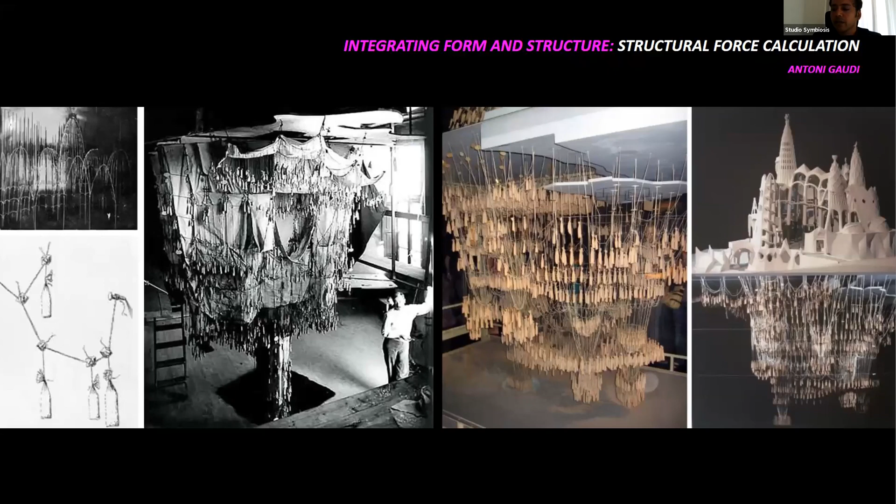So both these projects are looking at a system which was set up by the architect, but the design is generated through external forces, forces of nature. Why forces of nature? Because anything in nature exists in perfect harmony - you'll not find anything in nature which is out of balance. By using gravity and the wool thread method, what it essentially meant is that the project is actually in balance with the structure. And so this was one of the design elements used as a diagramming tool.

Now coming a bit more towards the current scenario, this is OMA. So the image on the left is showing this program, right? This program consists of housing, it consists of offices, parking, all of these things.

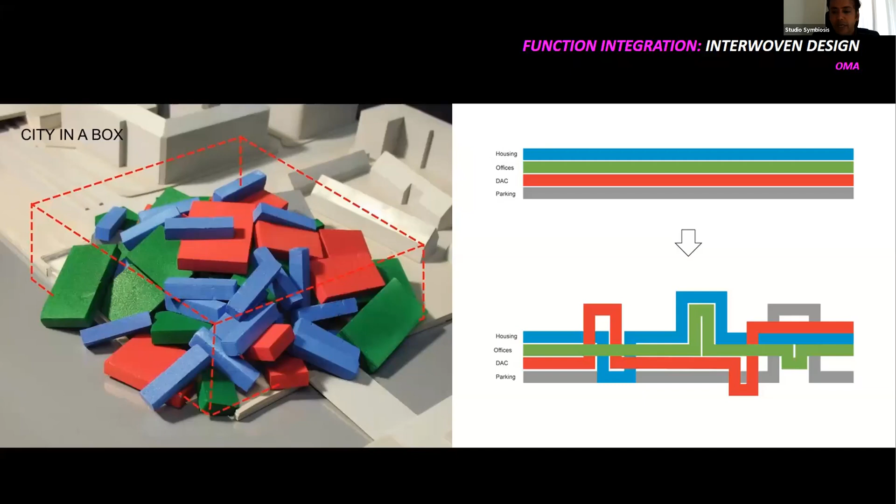What you see on top are four non-woven programmatic elements which exist. Using a diagrammatic system to interweave the program is a very simple system. Program at times is seen as a very banal thing by architects. But what OMA is doing at the bottom is interweaving that program in plans, sections, and elevations by nesting them into each other, getting a very rich interlayering and interaction of different functions with each other. So this is diagramming as a simple way of interweaving the design.

Why is it useful? By doing trajectory movement analysis, you can take out the most redundant space of any design and create a very robust and efficient design. So this is why movement analysis is very critical.

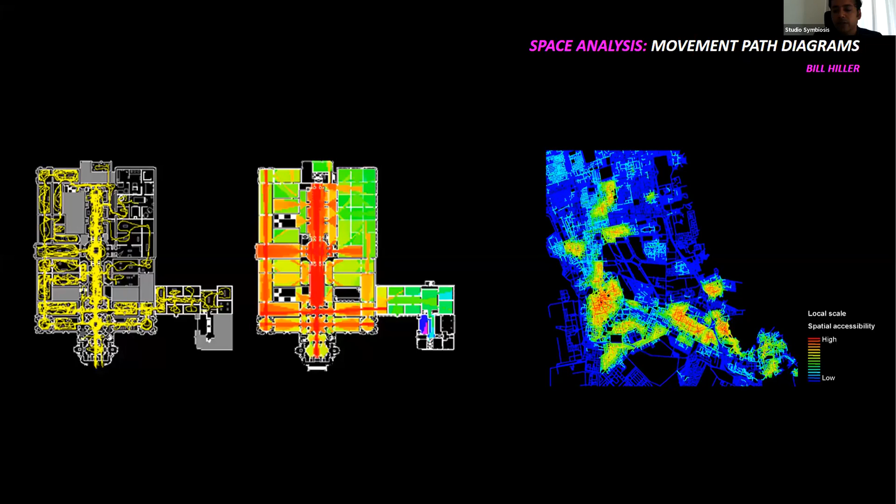Now agent-based modeling and other things are being done. Going to the city scale, space syntax - Bill Hiller is the master here. In this particular case, on the extreme right, they are doing city-based mapping of the hotspots of the city. Even now, if you're doing master plan studies, for railway stations you take 5 kilometer or 2 kilometer radiuses and analyze traffic and movement. This diagram helps you resolve that - the left two are for spatial analysis for a small architectural space, and the right one is for city level analysis.

Now for this diagramming system, I would like to present them in three systems. One is natural systems. Then how do you translate context using a diagram? How do you create an iterative system, iterative loop, or computational script - whatever you want to call it - as a diagram? And the last is material intelligence. I might not have time to cover all of them, so please stop me when I'm done with the time so I can move on.

The first one is about translating nature. This particular project is a perfume park and museum based out of Kannauj. Kannauj has this very rudimentary grassroots level perfume making, we call it Ittar - the essence of perfume. On the right are beautiful, elegant images from Grasse, France, where Christian Dior and other perfumes are made. This is a twin city agreement between Kannauj and Grasse to create a skill development center and perfume park and museum in Kannauj, where French perfumeries will come and train our local craftsmen. It's also a tourist destination. So for us, when we speak about perfume park and museum, that's the project.

Flower is the essence of creating a perfume. Perfume is made a few different ways - in Grasse, they always use flowers to create the perfume. So basically the essence of a perfume is a flower, and that's where we want to start. But having said this, we did not want to make another lotus temple - we do not want to be very literal. In our geometries and architecture, the systems are more important than the final look of the project at times, because the system is what organizes the geometry.

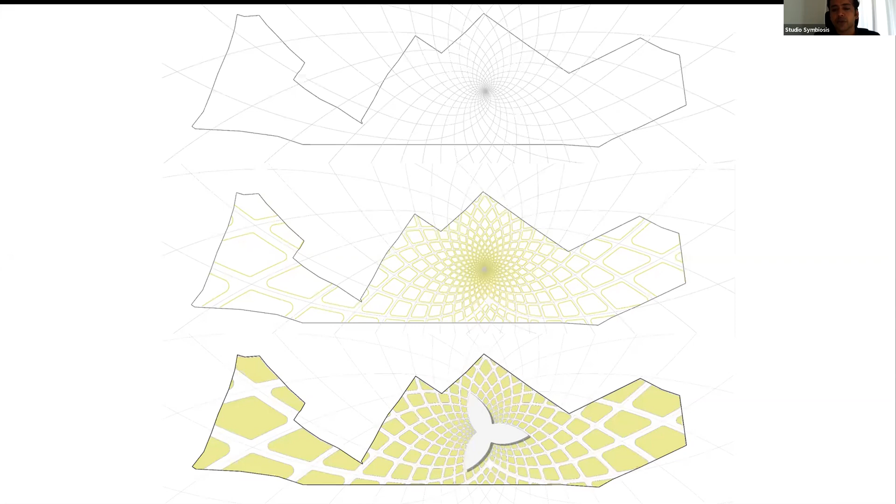So this is how the overall design came into being. You see these two big buildings on the left and right, and then in the heart of the project is the perfume museum.

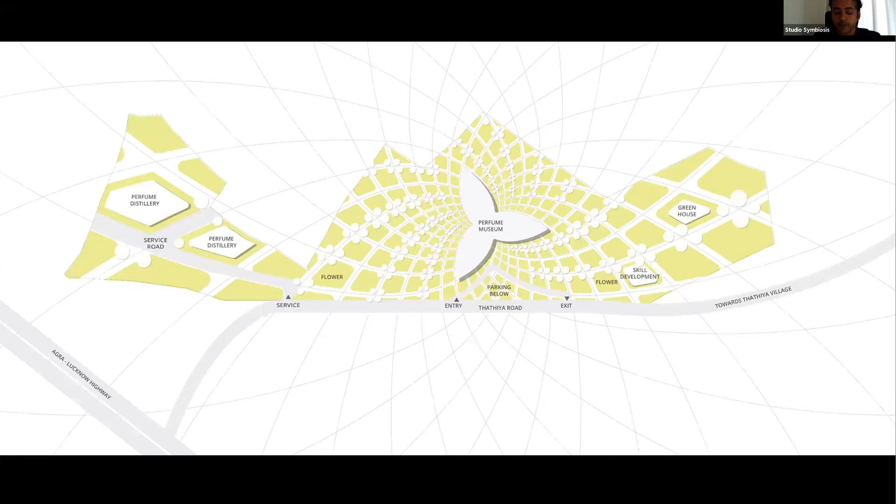Again, because it's a diagram-based system, this Fibonacci series also evolves in terms of the ceiling and the roof system of the main building. The main building itself is 3 petals of a flower. So this is how we conceptually modeled and designed it, which becomes a central part.

And then there's a gradient in terms of a very public function for the visitor, and as you move outwards, it's more for the function which is happening for the performance of the particular site.

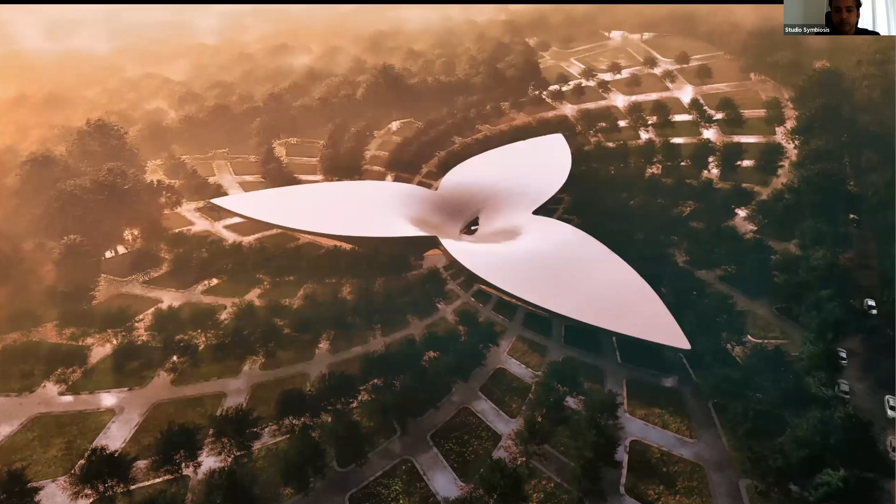So yeah, this is the overall view. And with these Fibonacci lines, the very nice thing which came as a surprise is that when a person is moving on the site, the trajectory of movement is always heading towards the museum. It converges, because the diagram is based on a convergence diagram, so everything converges into the central museum, and this becomes a main focal point of the design.

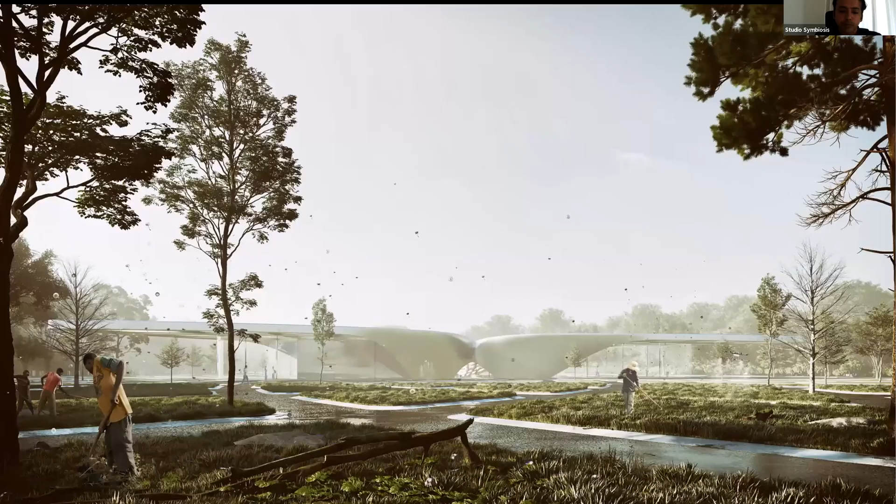So this is just showing the day-to-day gardening of the park and the dandelions flying around.

Now the second project is again a representation of nature. The project is based in Udaipur, and the idea for us was to create a dune complex. It's a 1.5 acre property, and the idea is to create these villas, one villa each, 8 villas in total. We wanted to translate this context of the beautiful sand dunes, this beautiful color, so that a guest, when he comes there, experiences that he's staying in the dunes of Rajasthan. So this was the ideology behind the project.

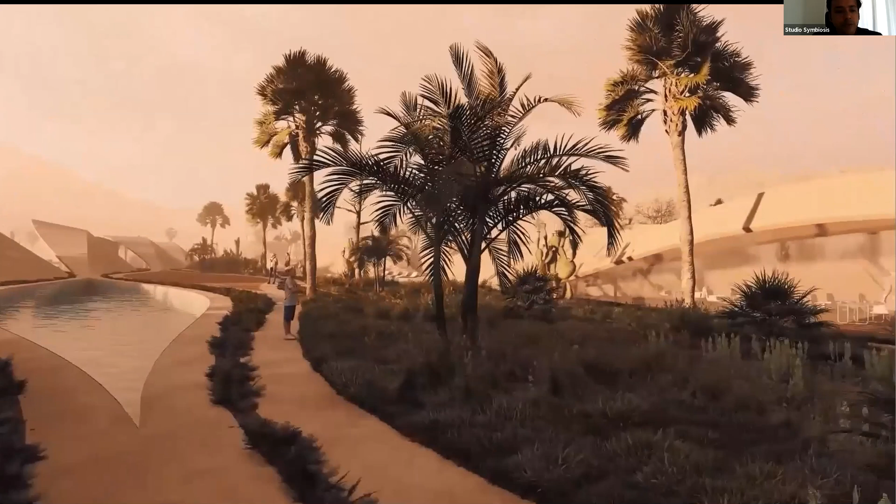Also, the materials are lime plaster, and we're using ferro concrete for the shells. The idea is, of course, also not to shoot up the cost of the project by doing these contemporary complex geometries.

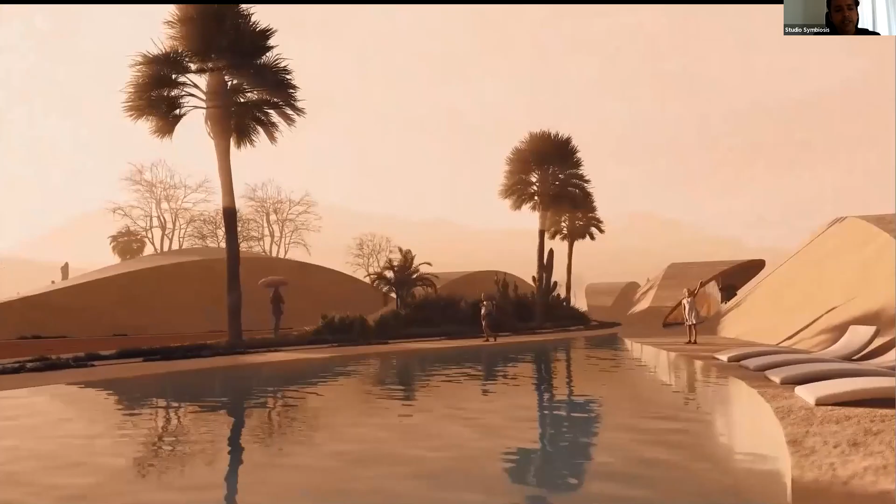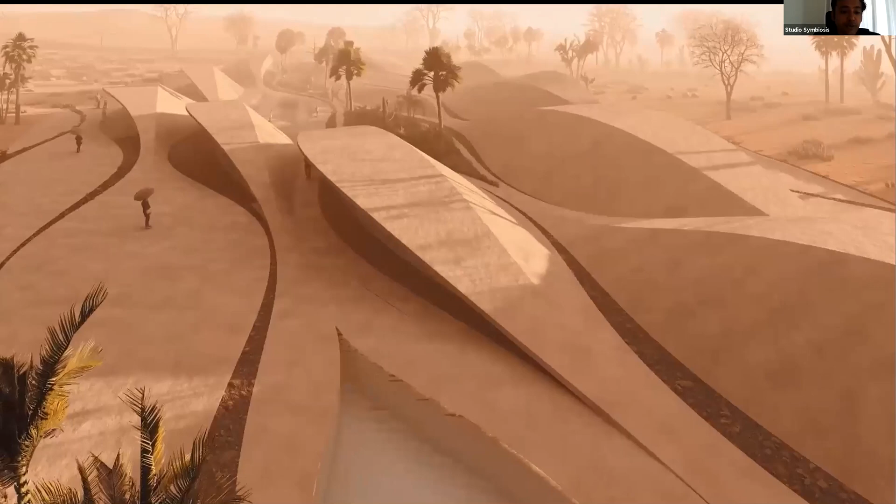So the central part of the project becomes an oasis with the water body, the pool sits here, and the villas surround it. Each villa seamlessly flares out from the landscape and disappears back into the landscape. This was the entire thinking, that it should be about nature, so when a person comes here, he should really experience what Rajasthan can be about, or if you are really a person living inside the dunes, let's say, this is the feeling we get.

So these are just some of the images from the project which we are constructing. Again, architecture is not just about visuals, it's also about constructability, which is very important.

As far as possible, if we can be sustainable, not just in terms of materials or other things, but we should also be sustainable in terms of the local craftsmen, because we cannot use excessive contemporary technology, and at the end of the day our local craftsman becomes non-existent. So this is something we are at least trying to avoid.

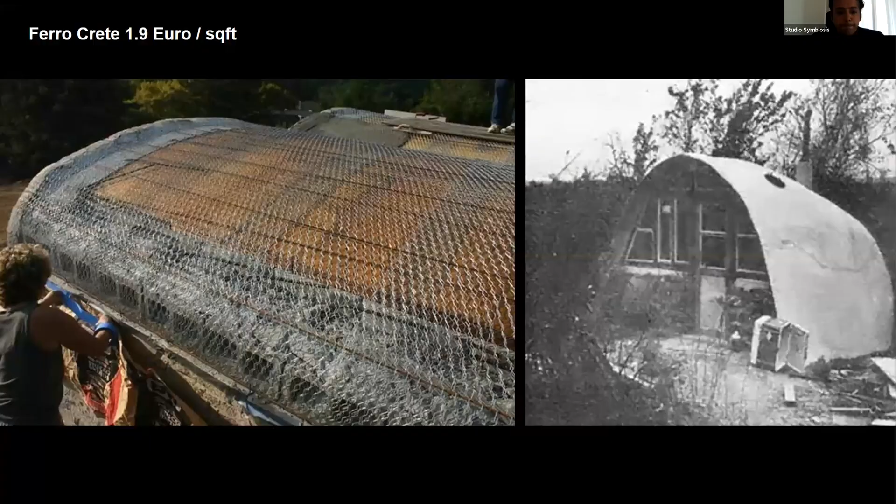So these are some more visuals where this dunescape is forming from the landscape. It's a ferrocrete shell which we are creating. In Udaipur, they have some ferrocrete engineers and contractors, so we are using these local contractors using ferrocrete. It's a very simple and very old system.

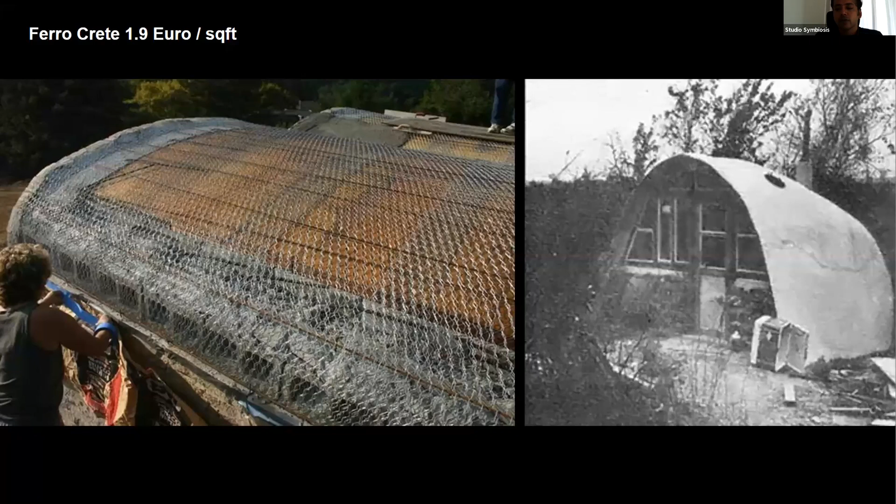But as we get more contemporary, a simple example is chip flooring, used in India, which was about 50 to 100 rupees a square feet, versus terrazzo, which is Italian flooring, at 1,000 rupees a square feet. Most people cannot tell the difference between the two. Similarly, if you look at a ferrocrete shell versus something very contemporary using laser jetting and laser cutting, at the end you cannot really tell the difference in technique or technology.

Another thing we are doing is promoting local craftsmen who do lime plastering. In the renderings, the texturing you saw on the building is using lime plaster, which essentially finishes off the ferrocrete shell. For this, we are again using local craftsmen from the city, from Rajasthan itself.

And the central part of the project becomes the performance area, because if a guest is coming, there should be a multifunctional area in the project where local artists can come, there can be some exhibitions, there can be multifunction space.

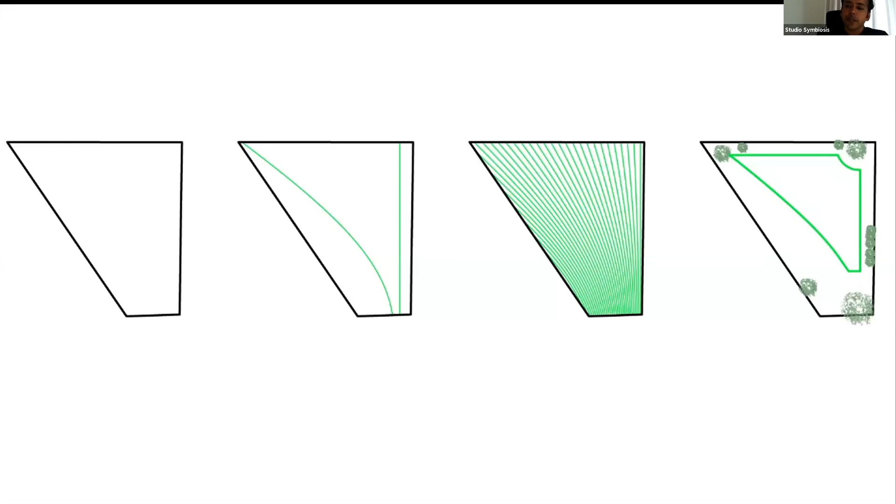When we visited the site, the client's brief was really that, Amit, if I can see the park from the house, and also if you can give me some green in the house. So based on these two design briefs, we create a villa which is sitting there. These streamlines come inside the property and create the overall form for us. So this was the concept design.

The idea is that the landscape seamlessly merges over the building, and as you step up, there's a rooftop garden. There's a direct connection we try to create between the built and the landscape by creating the steps which are emerging. The reason I'm showing you this is to also show the final image.

And of course, it was all about clean lines, because the outside of the project has this very clean line, so inside is also about the same.

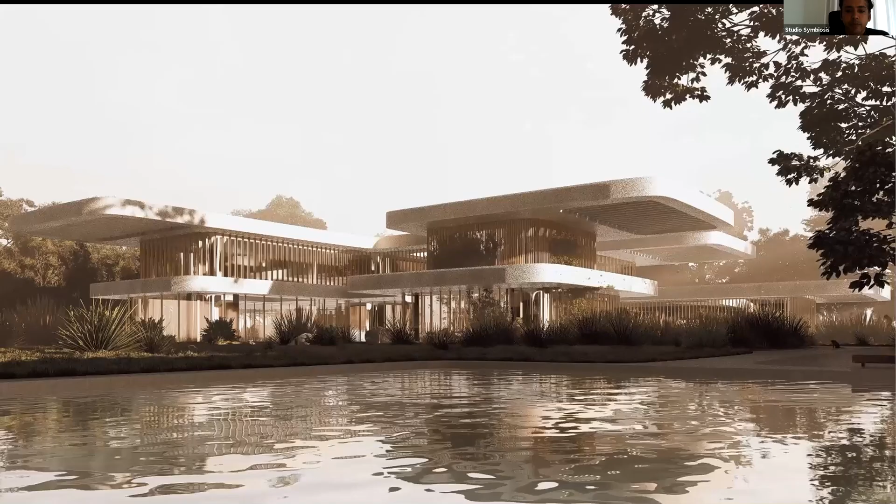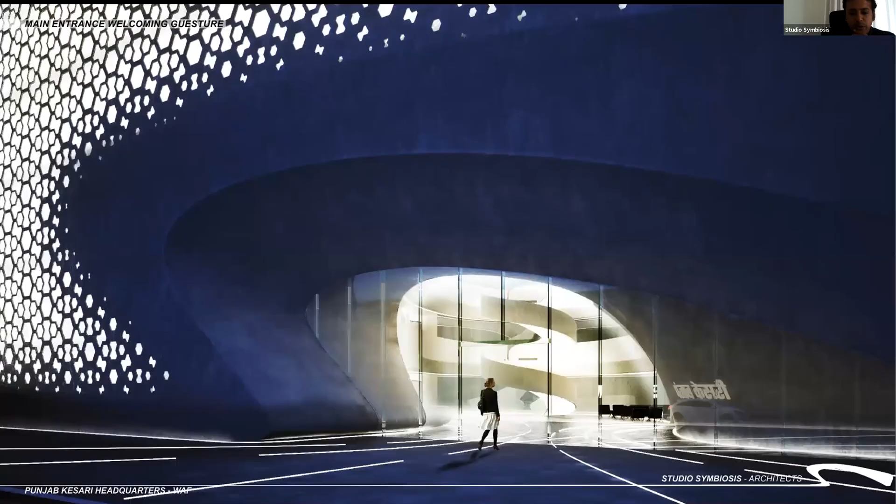So this one, the third topic is iterative systems. I think this project, some of you might have seen. This project now is finally about to finish in 2-3 months, the mockups are being done. I'll be very quick about this, because it's a very highly published project.

The entire thing about this was, when we started this project, the diagram for us was a counter thesis to all the projects which exist in Gurgaon. In Gurgaon, we have all these glass buildings, offices, but when you go inside the office they have to pull down the blinds because the amount of light coming inside is so much that there's too much glare and they cannot work inside.

So the thing about creating an office or any building is creating optimum spaces. In this particular case, the optimum lux level we were looking at was 500 lux on the desk height, and the glare index was also looked at. So for us, the diagram was basically the thesis which became the diagram and became the design.

And then as you come in, the lines of the building pull you in, the floor lines, the light lines.

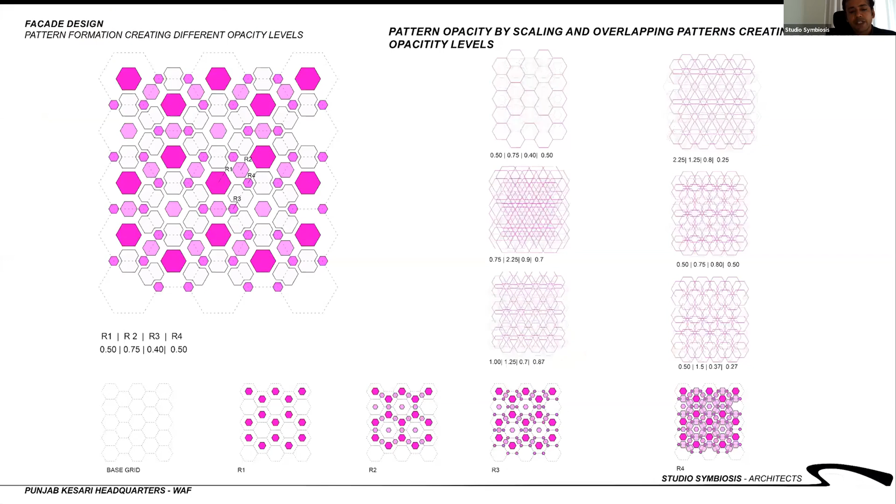So it was an iterative design where the facade pattern changes based on the view, escape, where the optimization of the wall-window ratio is done to create this opening ratio. North facade is 87% open, because there's not a lot of direct sunlight coming in, and south was 27% open. We increased it a bit because from inside it was a bit too closed, so we had to also look at this — you cannot just go by numbers from the computational systems.

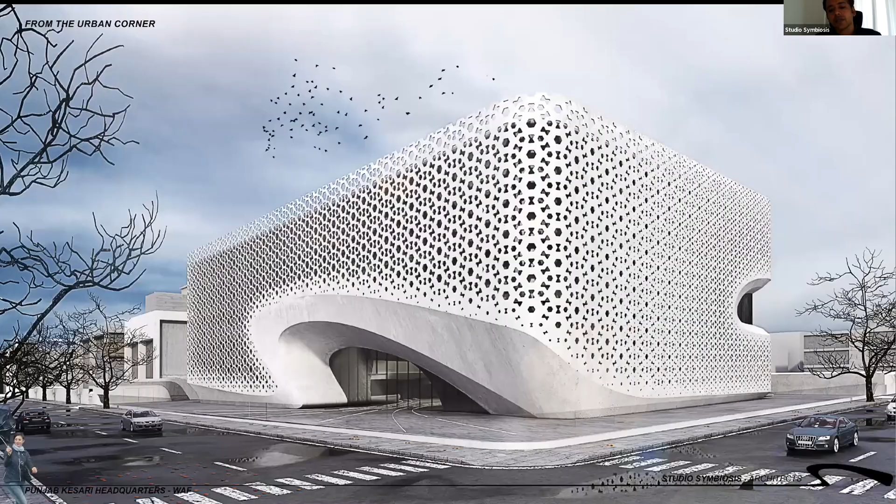So this one is an office building in Mumbai. It's a mixed use project actually — the lower part is office and the upper part is a residential building.

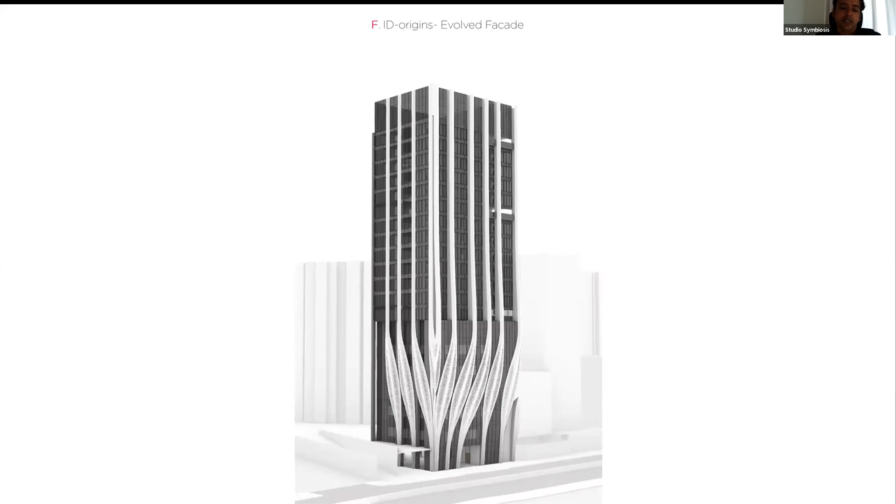The reason this sits in the iterative project is it was a very difficult project for us, because the first small building you see is the existing part of the project. This project sits there from the 1980s. The project is called ID Origins — ID is the name of the owner, and Origins is where the company started. Because of the sentimental values they had, they did not want to demolish the existing building.

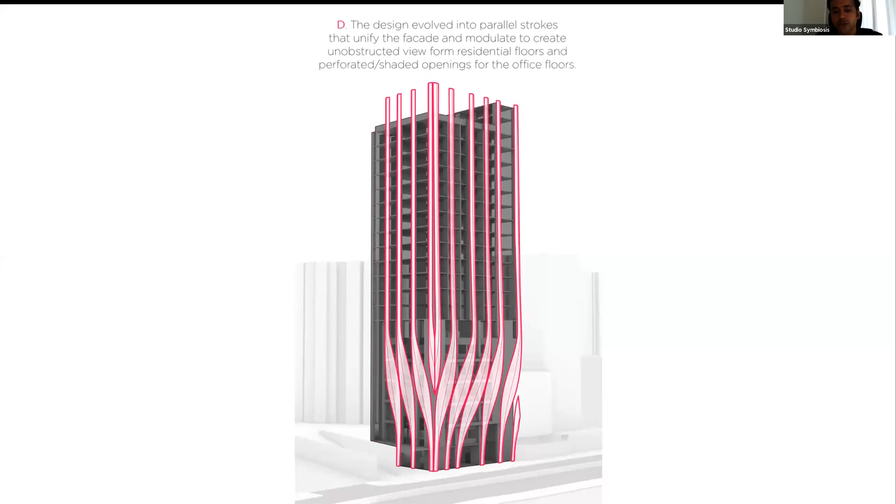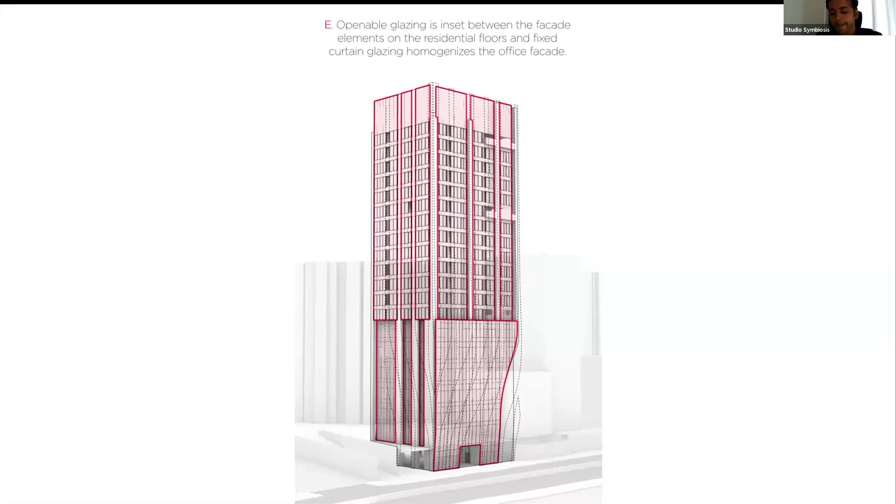The idea was to retain the existing building where they would operate their office from, extend on top by putting a transfer slab, residential floors, and somehow combine it. Because the existing site is so constrained and the structure is very critical, we had to pull these columns from ground up. So it was a very authority- and numbers-driven project to start.

But then how we tried to evolve this and make it a bit more articulated was to create these calligraphic strokes, which articulate the column grid of the lower floors with the column grid of the upper floors. This is a classic case of converting design challenges into design opportunity, because it was really a very shifted grid and the building steps back, and a lot of things happen.

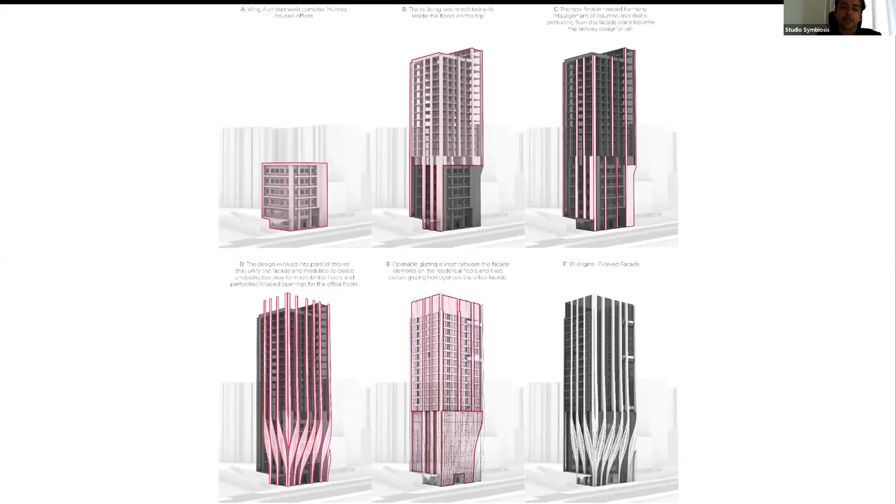This is the rendering we did during concept design. As you see, the lower part of the building is the offices, and we put perforated screens to make sure there's not a lot of solar heat gain inside the office building. On the upper floors, usually clients are looking at very clean visibility to the outside — they want floor to ceiling windows, and where the vertical strips are running is mainly the columns area.

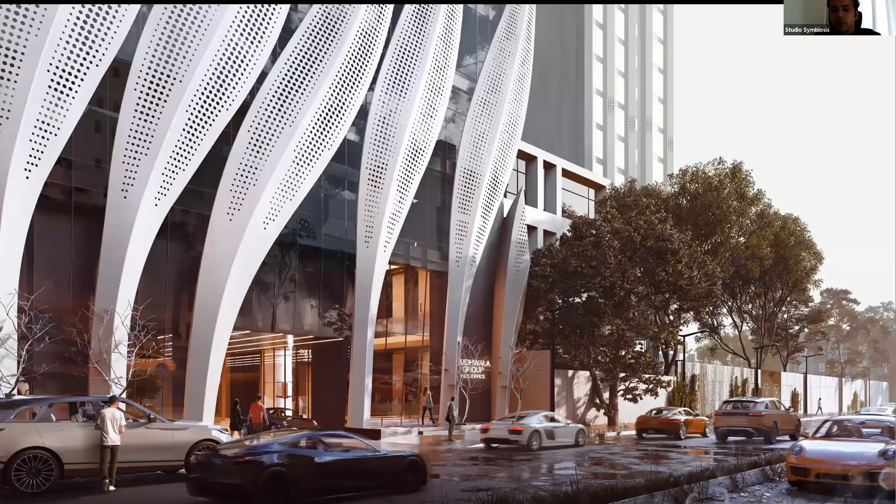This shows you the undulating calligraphic lines climbing on the building, creating this kind of sense. It's also performance driven space, because the lower parts are offices, like I said. So it was about creating a balance between the lower part of the building, the overall building, and the different parts of the building.

I think I'm almost out of time. I can just cover one more project.

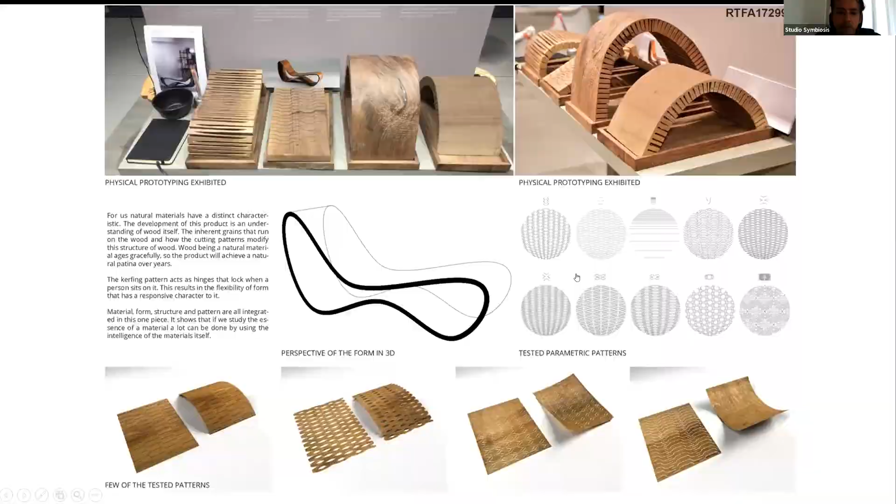Sorry, I did not really remember, there's a video here. I'll just scrub through it.

Okay, I think, sorry, my system has crashed. Anyway, this was the last project.

So here I wanted to show you how this material-based intelligence can be used to create a systematic approach towards design. In this case, it was the wood, a very simple piece of wood, with scoring lines, and through bending and starting this, we created this piece of furniture. So yeah, thank you, that's it from my side.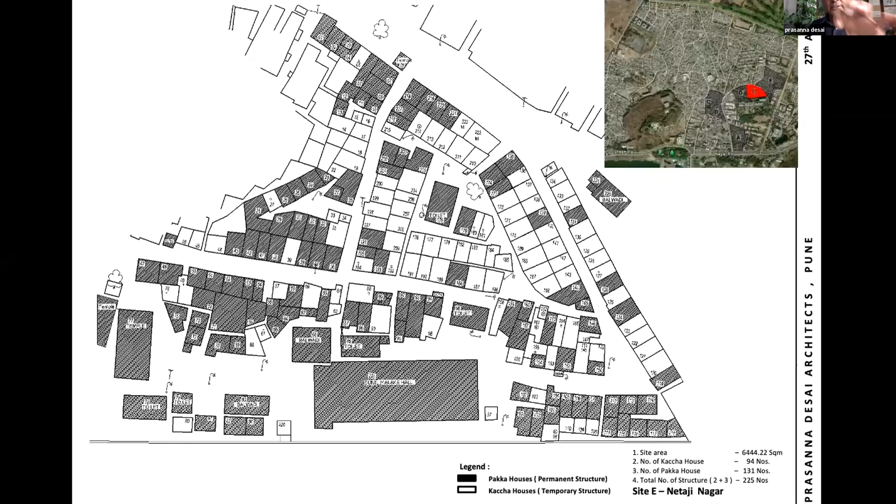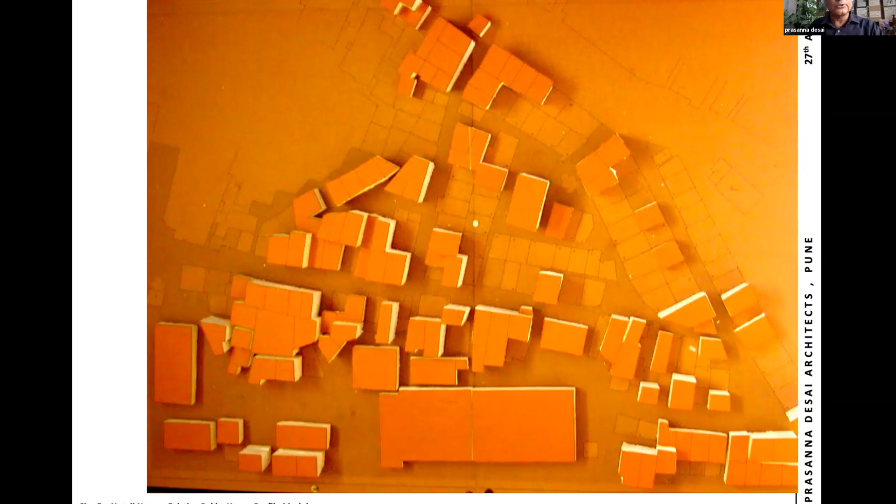Then we make a model. So you look at your own studio project, it's like a studio project. And I personally believe that the studio at the office and the studio of the college has no difference whatsoever. The office also should run like a studio in the college, and vice versa. So this is the model that we made. And then we said that these are the brown ones that we will insert.

For doing that, the documentation process of which are the kachas, which are the pakkas. This is what we do with students - we send them on site and say document everything. A number of students and trainees worked with us over a period of 4 to 5 years while doing this project.

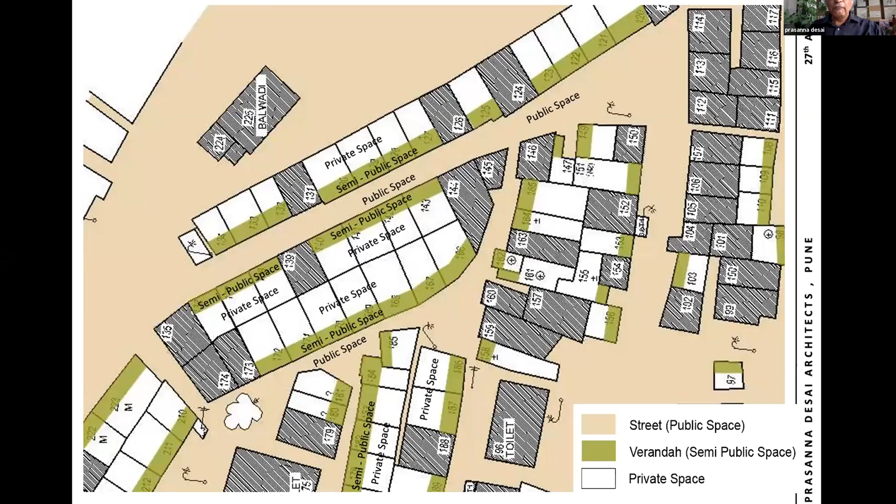We evolved a strategy where, looking at the street, we said there is a public space, a semi-public space, and a private space. You can see the cream, the green, and the white space. That is the way we thought we would do the inserts. We made a unit plan like this, which shows the three colors, where the front veranda merges with the street.

We made models like this. You can see the extreme right corner model, top one, which has the colored things. Somewhere we lifted the units up so there is a space at the lower level for some kind of activity - it may be papad making, a shop repair, or some open space for the poor, because they need these kinds of open spaces. This spills over onto the street. So it is evolving the process of design through understanding the behavior and the style.

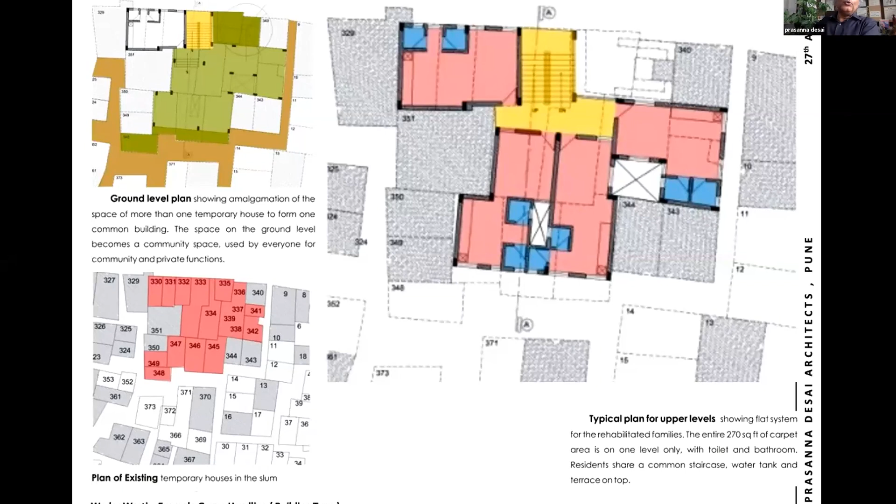The second one was where the plotted development was very, very dense. If you see the left-hand side bottom figure, you can see the number of plots which are there. We cannot rebuild on these small plots, so we amalgamated them and put parking below. That parking is also shown as green, as a social space, so we are not calling it parking. Then we have 4 units with a staircase, and each unit is 270 square feet carpet area, defined by government norms.

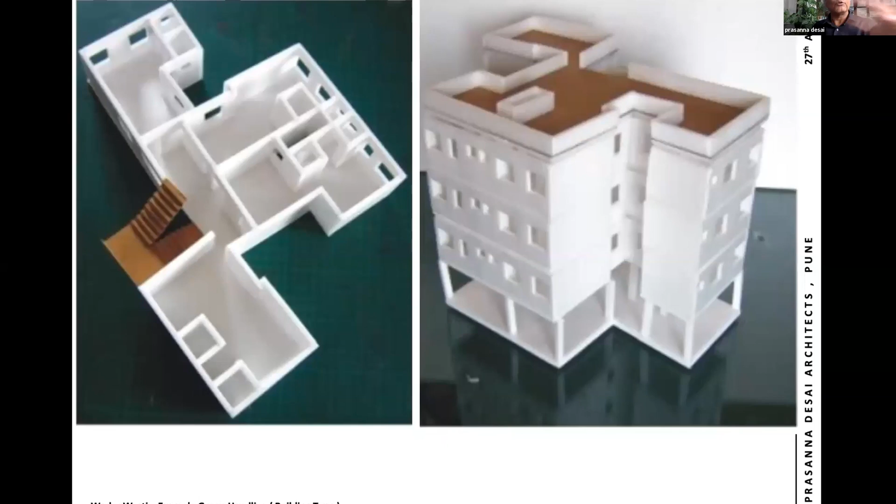Then we move on to what we used to term - this terminology evolved as research itself. After some time, going every evening for meetings, we started calling them Janta Janardhan meetings. The Janta, the people, are there with you, you have the models there, and the model is such a powerful tool.

Having said that, with two typologies - one the independent bungalow and one the G+3 - we went to the people and took a vote. This is also an evolving process, where we made these forms in Marathi and asked people which one they preferred. Obviously people preferred the plotted type, wanting independent plots with houses stacked one on top of another for themselves.

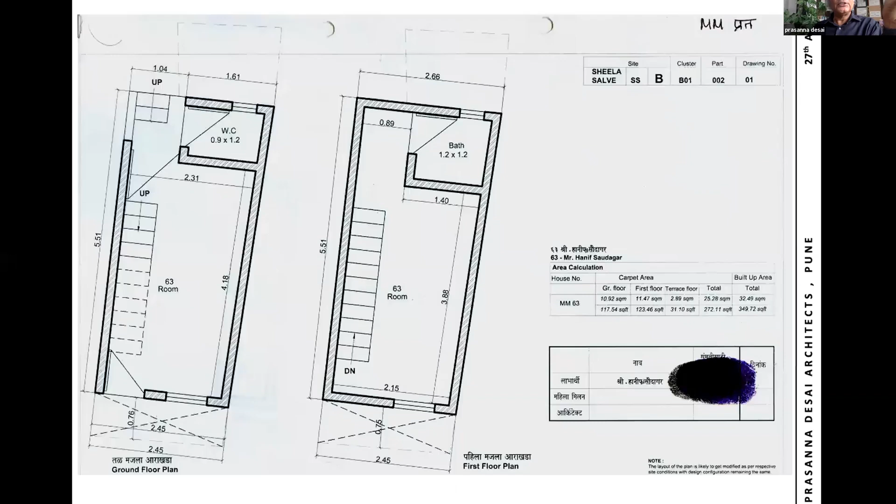Each site, each house is to be differently designed because of the site conditions. So you play with the development plan, work on it, and then come to the individual house, and for each and every house you make a plan for sanction. So here you are back to the mundane, but at a given time we were getting sanctions for around 900 houses. Somebody asked me how many projects we were doing, and I said we are doing 900 projects, because each house is a different project.

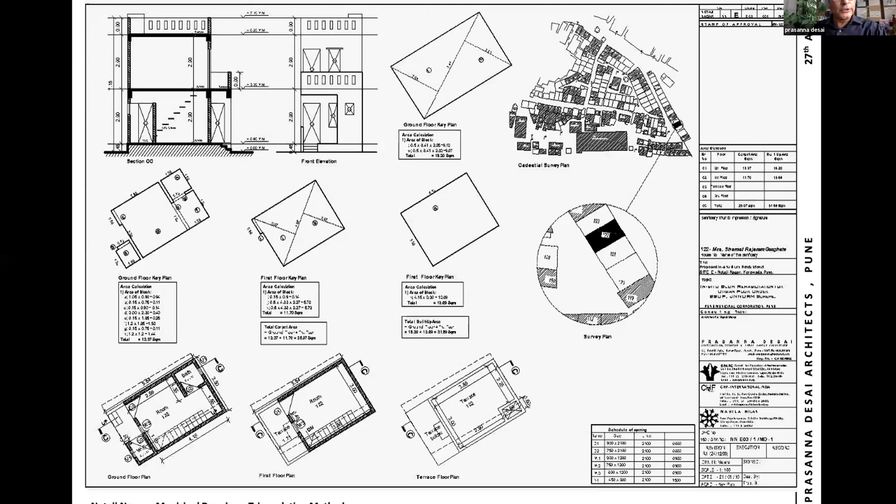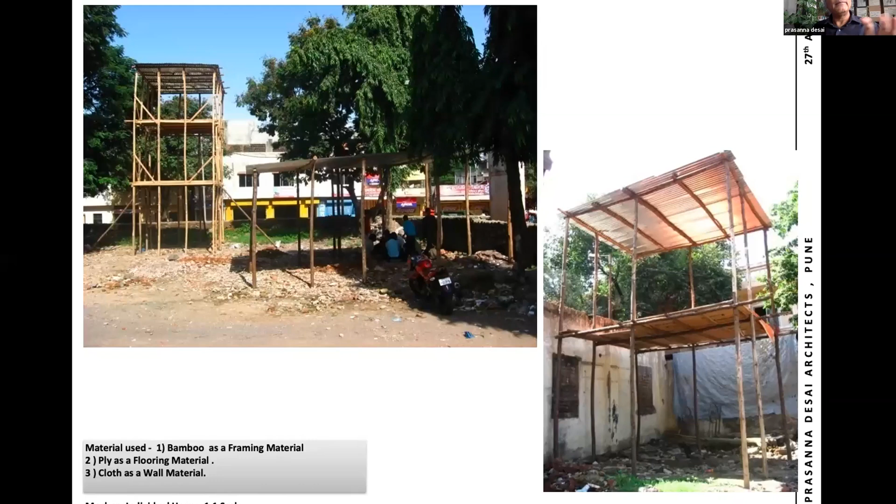Then we prepare a mock, because people are very skeptical about what kind of volume and what kind of house they are going to get. Obviously we couldn't build a complete house, but we prepared a mock with bamboo to show the kind of volume they will be getting, which becomes their house, an independent house that can also expand on top.

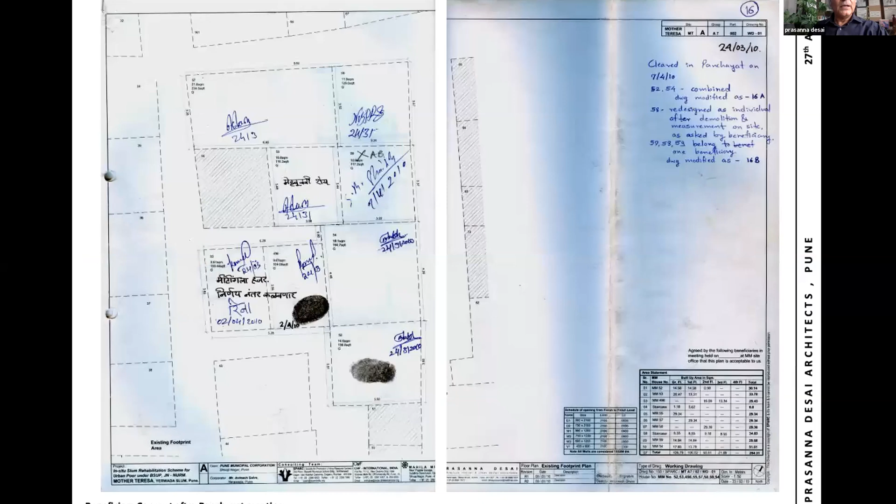Having said that, now comes the time of demolishing their own houses. There was the whole issue of how fast they wanted to demolish - they really wanted to demolish. So we worked out a procedure that until we give a signal for demolition, they will not demolish their old houses. We evolved what is called a demolition slip.

So though this was not our role, I must tell you that as architects, many of these things were not our roles at all. But we went on going deeper into the project and started evolving this process.

People used to come to our office, and at this particular time we set up a site office, because it was impossible to handle from a remote distance of 3 or 4 kilometers. At this site office, with our young team, every morning people would come and ask when we are giving them the demolition slip. So the demolition slip is also the power, authority, and responsibility.

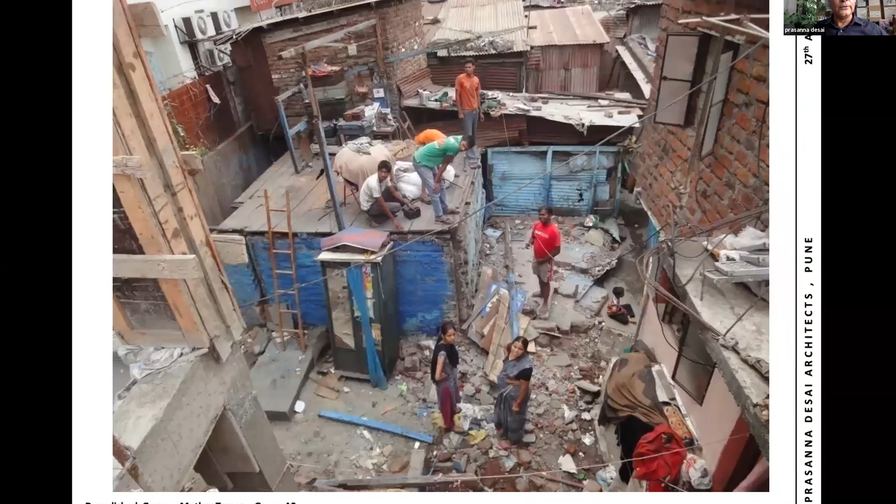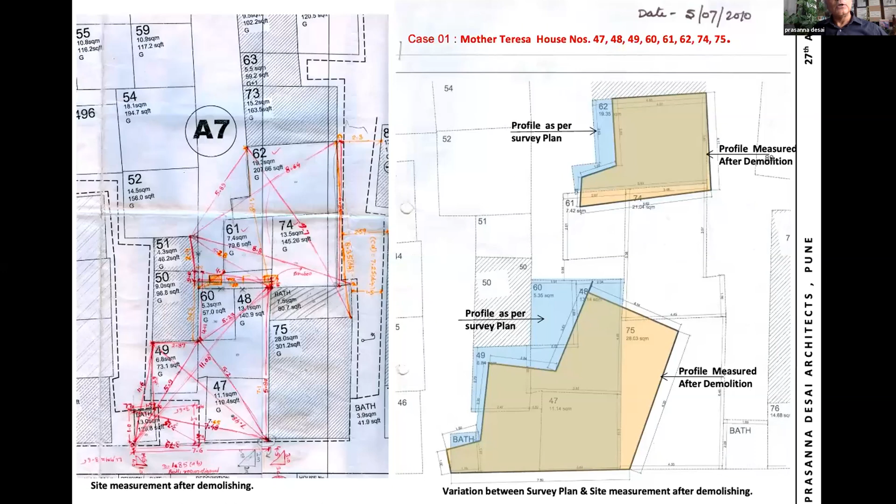Now what do you do? You again go into a redesign, you again go into a discussion, and you again go into taking signatures for their consent. Having said that, then you reach the final stage of construction, and make pure working drawings.

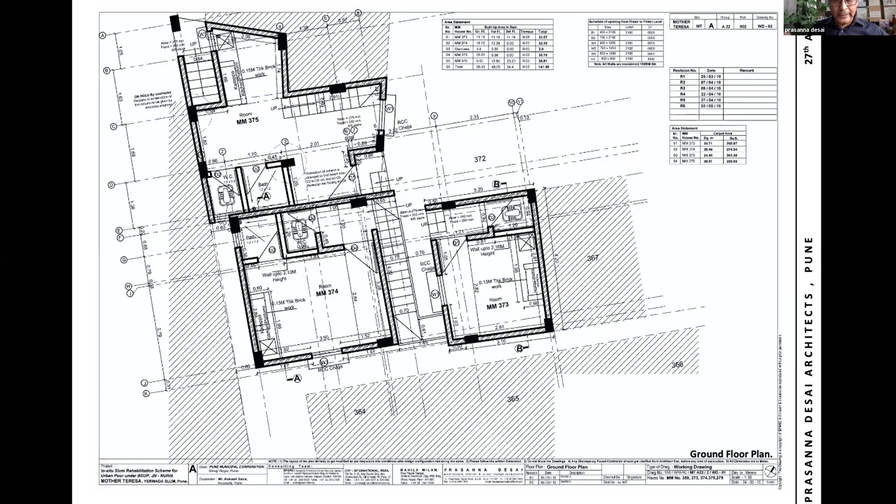Here I must also admit there have been a lot of discussions. Did we explore something, or was it a simple structure? No, it was a simple structure - column and beams - because there were many things which were also as per the mandate of the government; it had to take care of earthquakes. So the exploration of materials did not really happen much, but exploration of negotiation was always there.

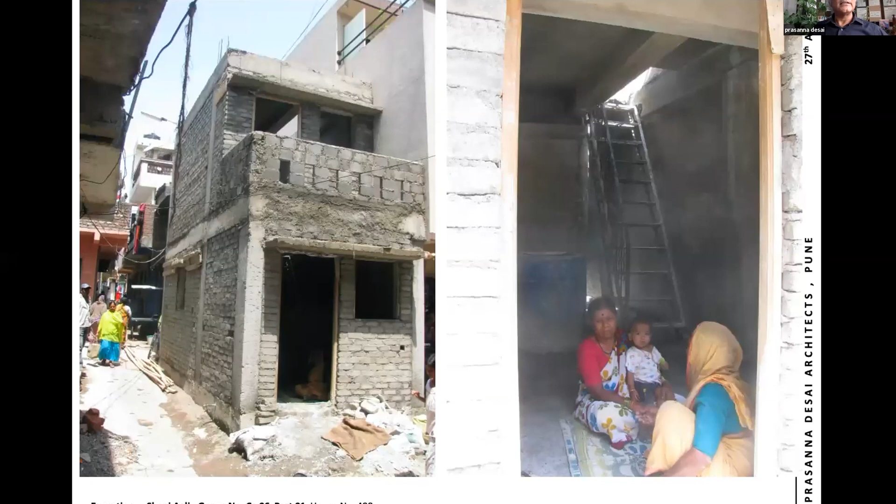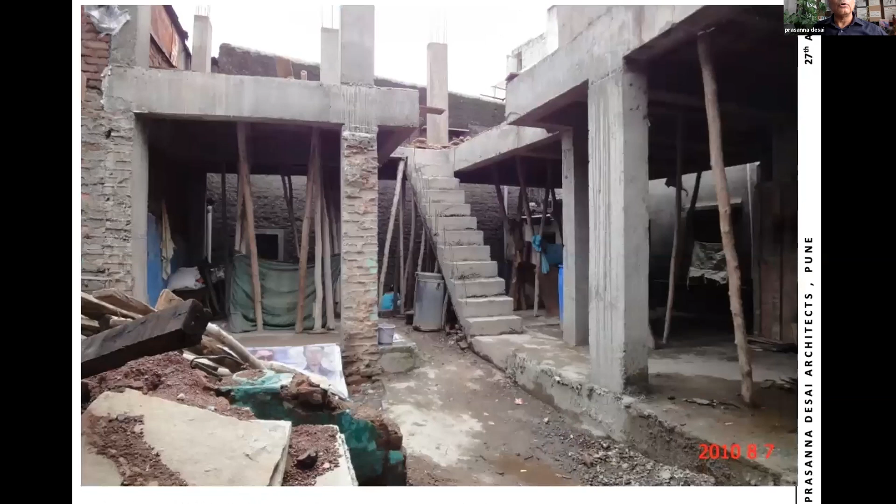So with these drawings, we went and started construction, inserting these houses into the slum. This is the way they were constructed - G+1, which were inserted as the house type, as we call it. Every house is different as per the condition of the site and condition of each person. These are the inserts - we are demolishing, we are building, we are demolishing, we are building. And that is what you get.

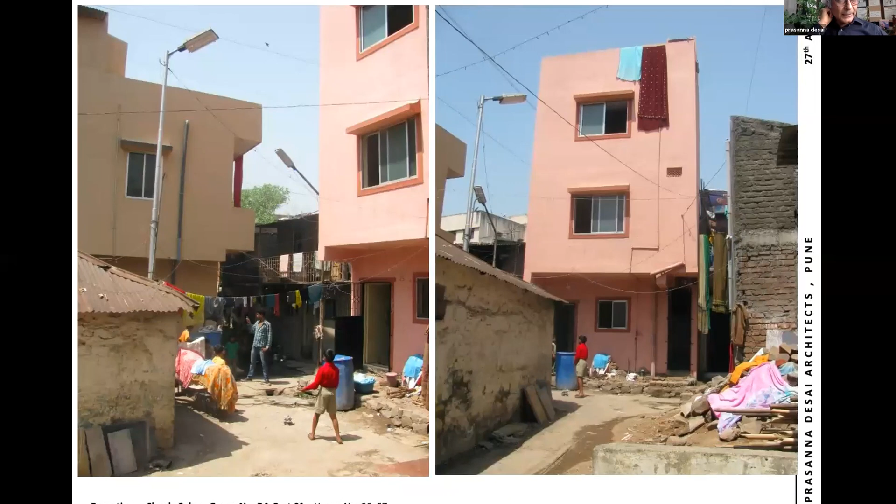As I earlier said, no clickety click, but let me tell you, not a single house has been sold by any of the slum dwellers, and they proudly own this. This is within a cost limit of 3 lakhs. And these interiors, obviously to a certain extent, people have been changing their tiles and trying to put it together, creating a healthy, hygienic living lifestyle for them.

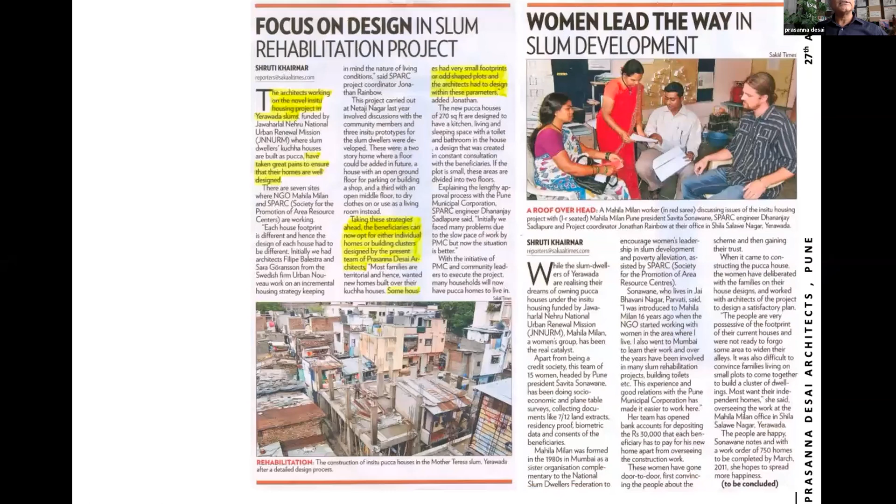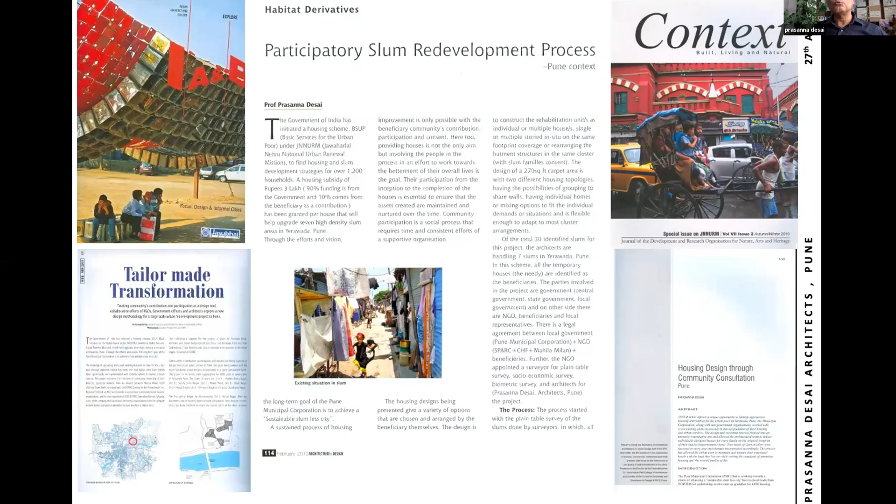Many different typologies or names have been given to this, from kacha to pakka houses, focus on design in slum rehabilitation project, women lead the way in slum development, Mahila Milan, which was the NGO doing this. This is in our architectural magazines, tailor-made transformation, participatory slum redevelopment process. This is Drona, which talks about housing design through community consultation, Government of India Knowledge Center, Indian Express saying how slums can get a facelift.

And this is the last and ultimate one, design with the other 90% cities. This was an exhibition held by the Smithsonian Cooper Hewitt Museum in New York, in United Nations headquarters, where this project was chosen. We don't actually design for 90% of our cities. Architects are involved with only 10%, or maybe 5%.

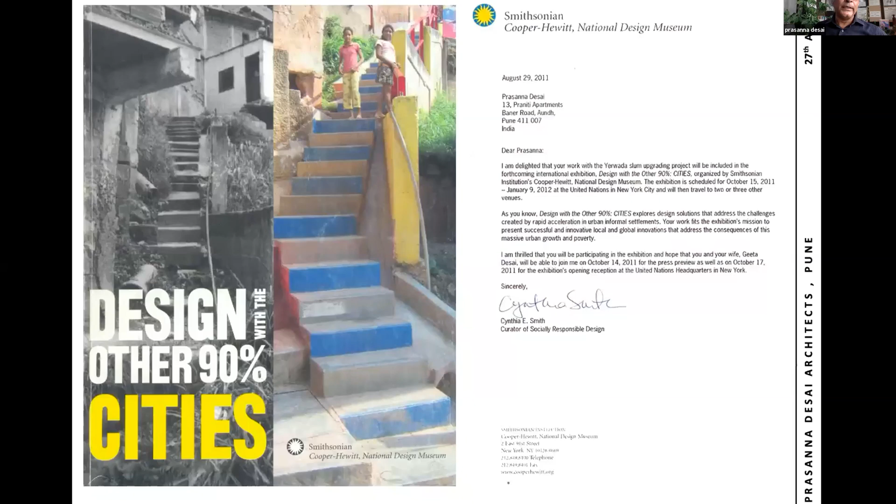The rest, people self-build. These were some projects which were displayed in United Nations headquarters, and from India, this was one of the projects displayed at UN headquarters. So from the slums where we are doing these models, made out of thermocol, these models landed in the UN, and they were displayed, and they traveled in the US. This whole exhibition traveled in the US for almost 3 years.

These were certain recommendations, which I will not go into detail, about the learnings from it. We gave certain recommendations to the government for phase 2 of BSUP. It takes time for the government to really reform certain things, but these recommendations and learnings were there. Maybe we can take them up in the question answer session.

This is what the feedback is. Finally, who gets benefited? It is directly the people, and it is they who give this reaction. So finally, architecture is extremely critical that we deliver to society and the people. It is not only for our satisfaction, but also for the satisfaction of society and the environment. So that has been the feedback.

The next one, as I said, research through print, is creating healthy and hygienic human neighborhoods. Here, the research has always been there, and for the last 20 years we have been going through this. The research comes from newspapers, articles, and others. This is an Indian Express piece which says 7 years ago, everyone saw Delhi's air taking a deadly U-turn. It talks about pollution, landmark studies you can look at with school children suffering, 'Leave Delhi.'

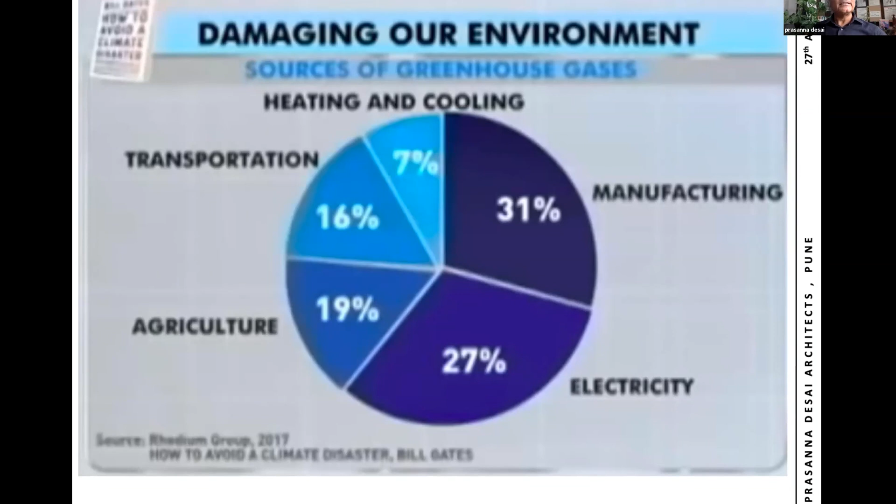The latest book by Bill Gates, How to Avoid a Climate Disaster, has a pie chart showing that transportation is responsible for 16%, heating and cooling 7%, manufacturing 31%, electricity 27%, and agriculture 19%. I feel except for agriculture, the rest is directly related to architecture, and I think we are responsible and need to take care of all these aspects. So 80% of the development that is damaging our environment, we are somewhere or other responsible for it.

And then we've been talking about all these typologies—rethinking cities, sustainable, resilient, livable, smart, etc.—but I think they all mean the same. Finally, you need a healthy environment.

Cities look like this today, where energy consumption levels are extremely high, and that is what we have gotten used to. There used to be cities like this, Jaisalmer and Jodhpur and all our old cities, which were built around climate, context, connectivity, and culture. Someone may say, is it relevant today? I feel everything is always relevant, and Corona today has told us that everything needs to be in balance.

So what is this balance? We are between the green and the red now. I think we have to choose a middle path. One is not saying go back to the green area, and one is not saying we should not move ahead to the current red, but we must choose the middle path. My famous example has always been food - we talk about pizzas and burgers and try to adopt and ape it, but the Indian thali is the best. Architecture, I feel, is the Indian thali, because it varies from Kashmir to Kanyakumari, and it needs to be adopted within the context. We wear like this - this is our dressing sense. On the left we have somebody from Rajasthan and somebody from UK and Europe, but we shouldn't be doing this. That is what we need to really realize.

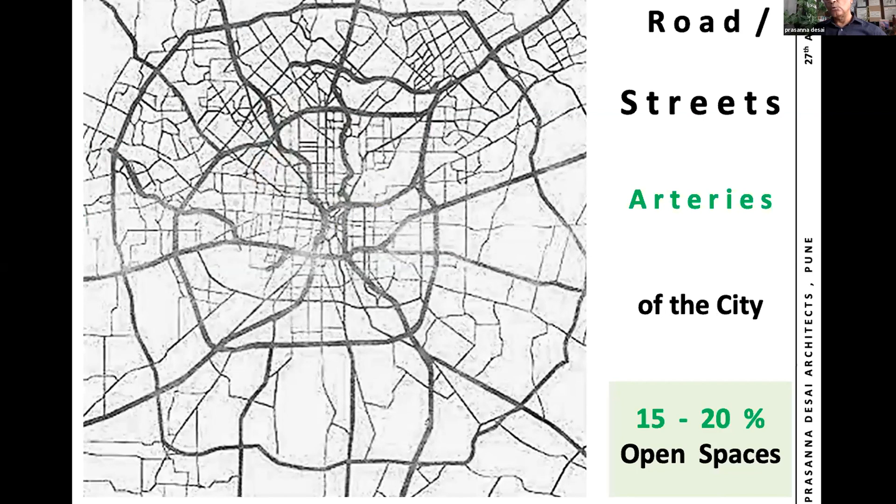Research says walkable cities and walkable neighborhoods can reduce blood pressure and hypertension risk. More walkable neighborhoods can reduce diabetes. Brisk walking is a better method than losing weight and going to the gym. So roads and streets are arteries of the cities, and they are almost a minimum of 15 to 20% of open spaces, at times more, maybe 30%. This can be greatly compared to the veins of our body.

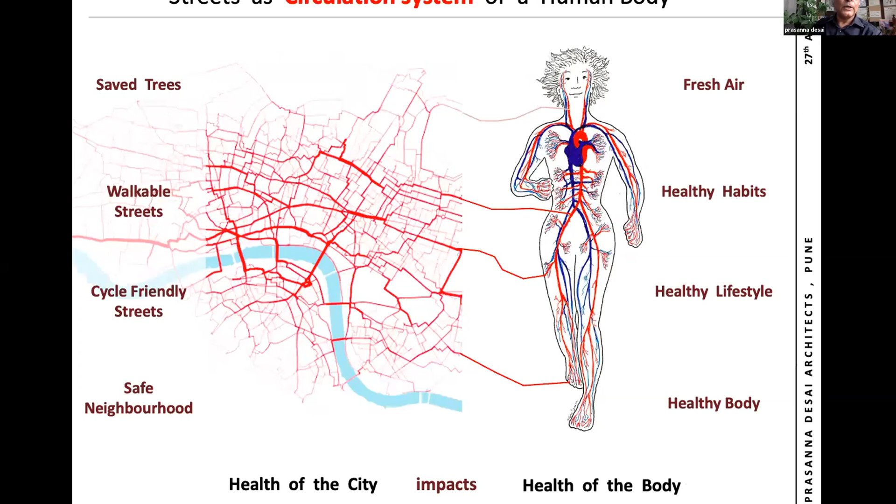If we save trees, we get fresh air. If we have walkable streets, we get healthy habits. Cycle-friendly streets will give you a healthy lifestyle, and safe neighborhoods will give you a healthy body. So I feel health should become the priority for designers.

The points to ponder - this is Enrique Peñalosa, the Colombian politician and planner: a developed country is not a place where the poor have cars, it is where the rich use public transport. If you plan cities for cars and traffic, you get cars and traffic. And if you plan cities for people and places, you get people and places.

This is Fred Kent. A healthy neighborhood, I feel, needs to have this 3 S approach - safety, shade, and society. When we say safety, we are direct - 75,000 young lives lost in road accidents. Speed kills. If you're hit by a vehicle at 20 kmph, the chance of survival is 9 out of 10 survive. If hit at 30 kmph, 5 will survive and 5 will have a fatal accident. If hit at 40 kmph, only 1 will survive and 9 will not. This is what needs to be understood.

The next one is in terms of hawkers on the street, who become part and parcel of our street. Whether they are facing the road or facing the shop along the footpath, they become the eyes on the street for safety. So safety is not just with the vehicle, safety is with people also. Safety can always be put in with this.

This is a very famous slide about UK, USA, and China - you can have so many cameras where you may be able to know about the act after it's done and maybe catch the culprits. But the Indian cameras can prevent the act. This is the eyes on the street theory by Jane Jacobs.

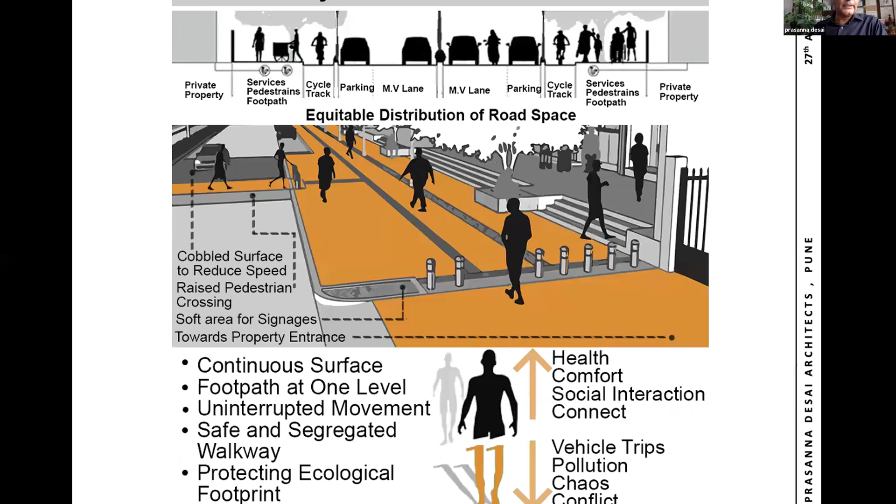First principle, universal accessibility. Second principle, walkability. Third principle, paid parking - parking needs to be paid and organized. Hawkers and vendors policy - hawkers and vendors as eyes on the street need to be organized.

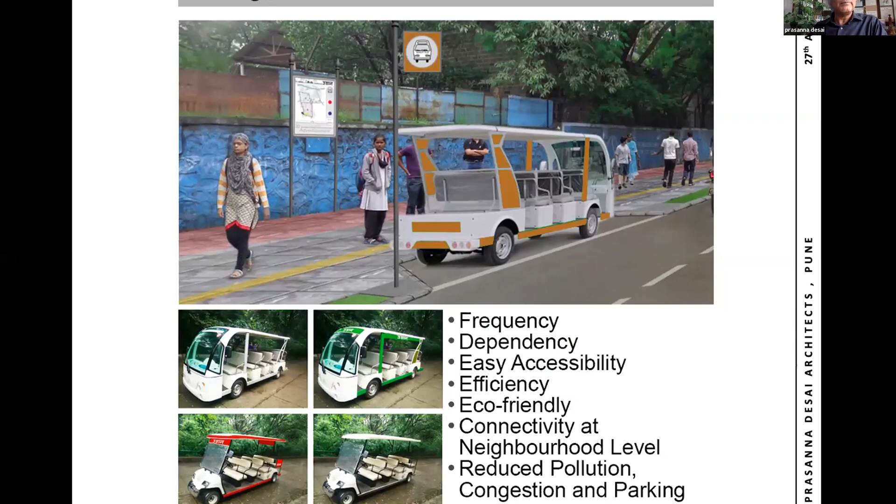Cycle network at various levels, and neighborhood shuttle, so that we have within the neighborhood some kind of light public transport which helps us, maybe a sharing auto.

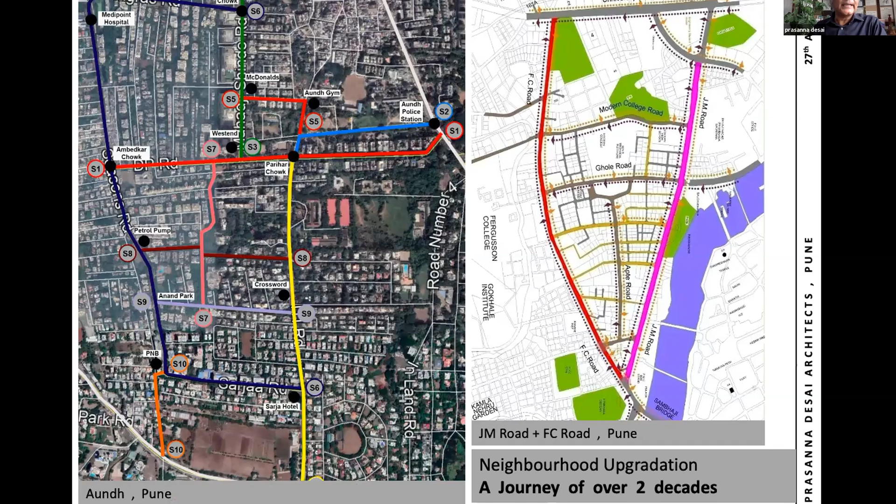So we have been working in 2 neighborhoods. One is JM Road, FC Road, which has finally now been implemented, though we did not implement it ourselves, but the research has been done for the last 10 to 15 years. And the second one is Aundh, which went through these 3 phases. It has been a 10 to 11-year journey, which is 2009, 2014, and 2016.

The second one was, as mentioned in the brief, Streets for People, by the People - a workshop done by PVP College of Architecture with SUMNet India and other NGOs, where we involved 80 students of the third year BArch, and we said that we will expand from one street to the neighborhood.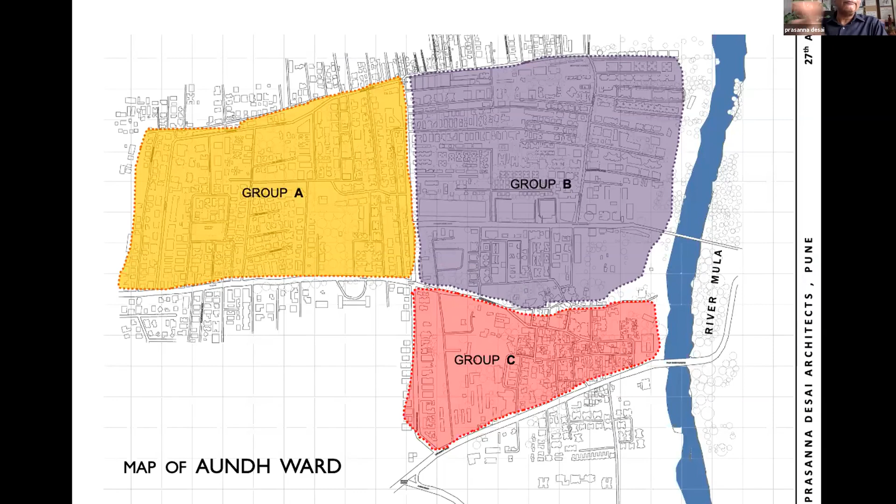So the neighborhoods were divided into group A, B, and C. Then the discussion on the street, the classroom at the street, the classroom with the senior citizens, and putting up an exhibition on the street that this is what the change is going to become. And after having put up the exhibition over the weekend, we come out with a resolution and tell them that this is what will happen.

But a 5-year wait in between, it comes again in this print media, for the people, by the people. And then after a 3 or 4 years wait comes Smart City, where the quick win projects were to be put up.

Design, discuss, and demonstrate in these 9 streets, public discussions in the auditorium, on the street, in the committee rooms, exhibitions again, with the shopkeepers, with the commissioner, and we coin this what is called as healthy Aundh ata aple angan. Healthy Aundh up apka angan. Now your courtyard. And then we put in healthy as habits, ecology, amenities, lifestyle, technology, heritage, and you.

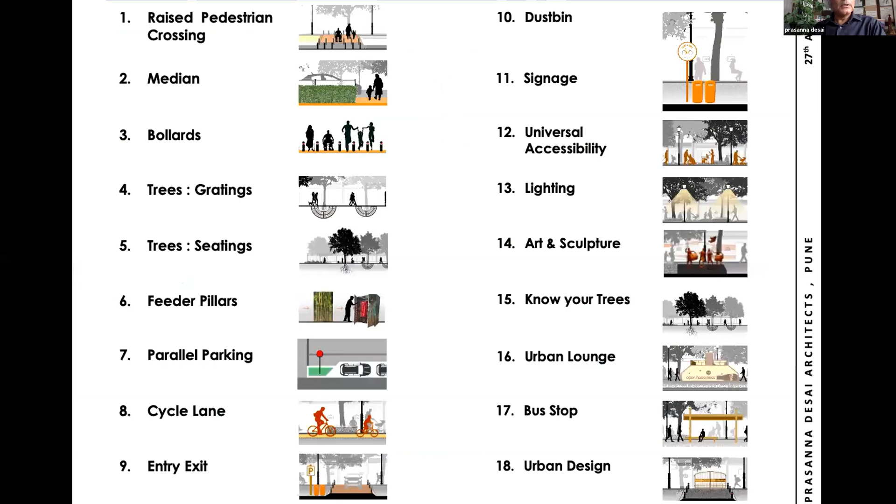This is what was existing. This is what was proposed in terms of views. These were 18 elements which were introduced, and I'm not going to explain all these elements, though I would have loved to.

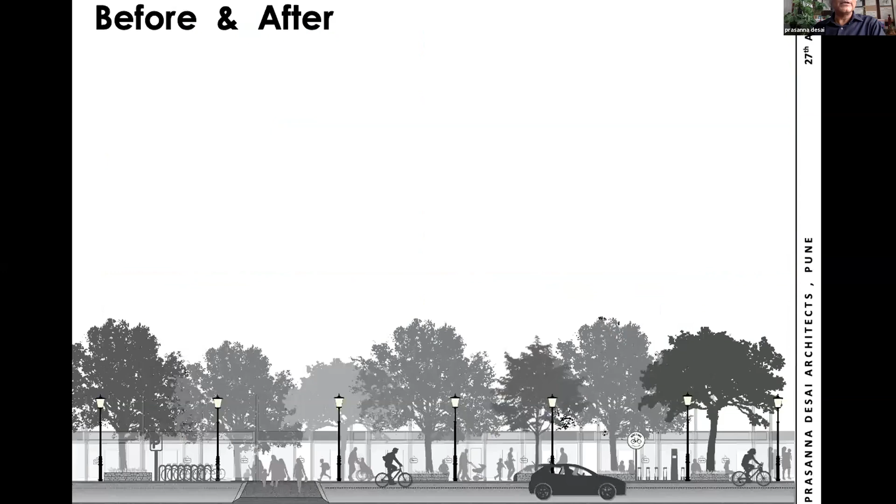So we demolished the property lines along with the corporator and reached right till the doorstep. People interacting, youngsters interacting, creating a social space along the street, which becomes the itinerary. Before and after will tell you very, very clearly what it was.

You can see the boundary wall in front. The boundary wall goes and you take the space up. So a lot of interaction with the shopkeepers, people, condition of the street on the left-hand side, condition after you do the work, taking care of the trees and giving the tree breathing space.

You can see the tree and you can see the tree having the breathing space with the stonework all around. So you can look at each and every one of the 18 principles adopted here, trying to take the footpath at one level itself, universal accessibility, organized parking, everything that we said was put in place.

Citizens chatting, enjoying, physical distancing. Social distancing is not the word that we should be using. Walking. So take care of your health.